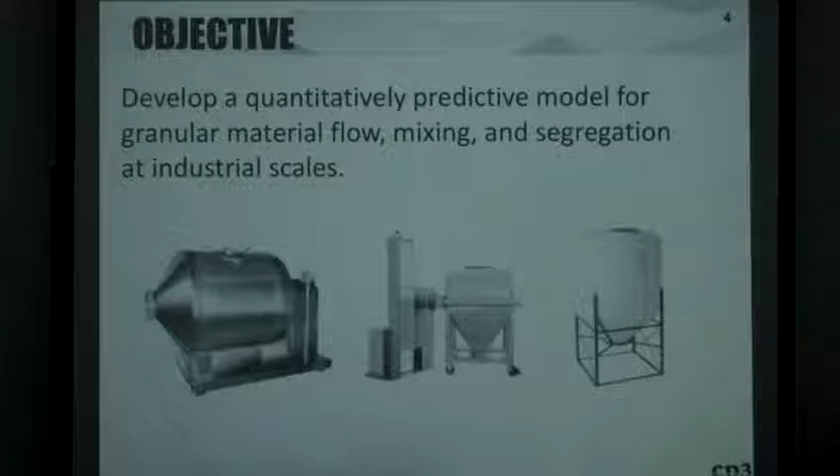For a long time, from the very beginning of DEM modeling, most comparisons with experiments have been qualitative - wow, this looks the same as that, so it must be working well. But we want to try to make it more quantitatively predictive.

The state of the art in powder flow, and especially mixing and segregation, is discrete element method simulation. Here you model individual particles - you're all familiar with this. You get the dynamics of the macroscopic system as well as local behaviors simultaneously.

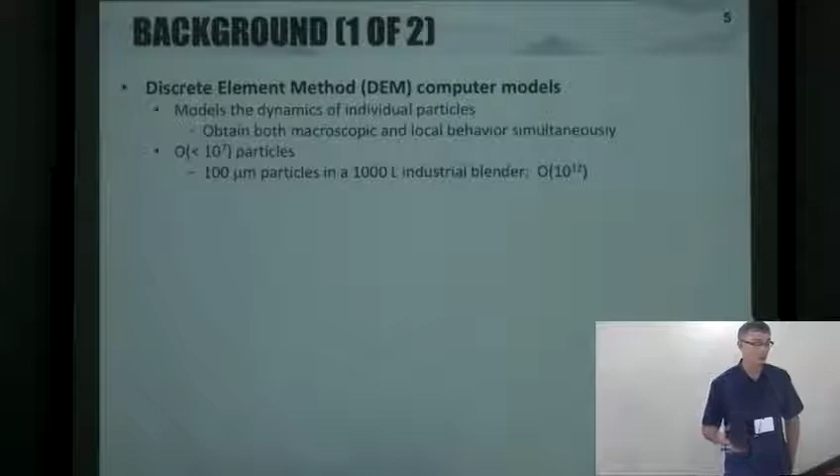At best right now, these simulations can model on the order of maybe 10 million particles. Most people using these in practice are probably modeling 10,000 to 100,000 particles, much smaller. But if you think about how many particles there are in an industrial system - a 1,000-liter container, 100 micron particles - we're dealing with 10 to the 12th particles. So we're still 5 orders of magnitude away. We've got a long way to go.

Computers are getting faster, everything is going great computationally, but we've got a long way to go. Even if we get closer and closer, the models used in DEM are greatly oversimplified typically. We're dealing with spheres - shape effects aren't normally included, especially at big scales. Contact force models are oversimplified typically, with a lot of assumptions going on.

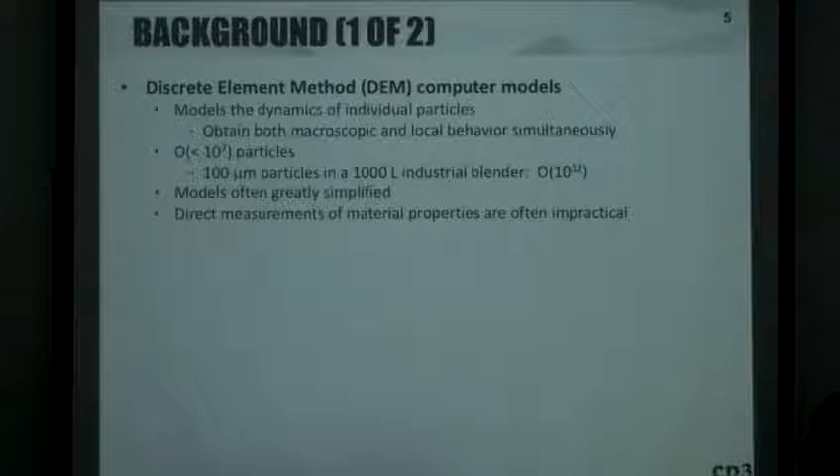Another big thing people don't often talk about is the measurement of material properties of particles. Imagine measuring the coefficient of restitution of an irregularly shaped 10 micron particle.

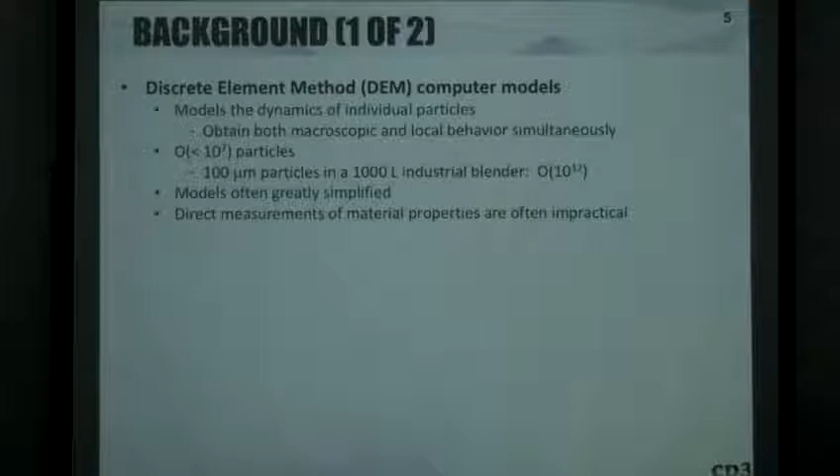People are guessing rolling friction coefficients, purely guessed. What's interesting is those parameter values are often hidden, buried through references. Someone cites a paper where they used a rolling friction coefficient of 0.005, and they go back and reference someone who used that value, and so on, until you find the first paper where they said, we don't know what to use, so we're going to use 0.005.

This happens all the time. So that's a big challenge.

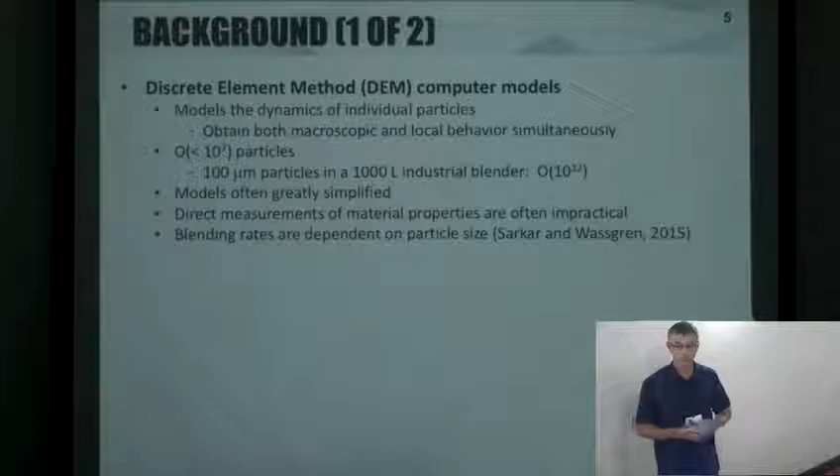The other thing specifically for blending is that blending rates are dependent on particle size. If you look at how fast particle systems blend, particle size is an important parameter. So if you use particles that are too big, it may not be quantitatively accurate.

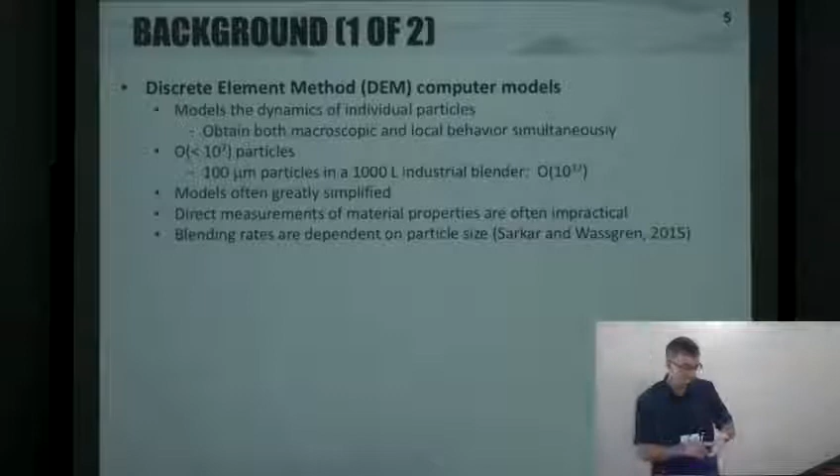All this being said, I don't want to dismiss DEM. It has very good use, very good understanding. In some cases it's quantitatively useful when dealing with big particles, like in pharmaceutical tablet coating and things like that. So it's still very useful, and I think it's particularly useful for looking at things at the local scale. That's what you'll see in this talk - we're combining macroscopic scale models with microscopic scale models which come from DEM.

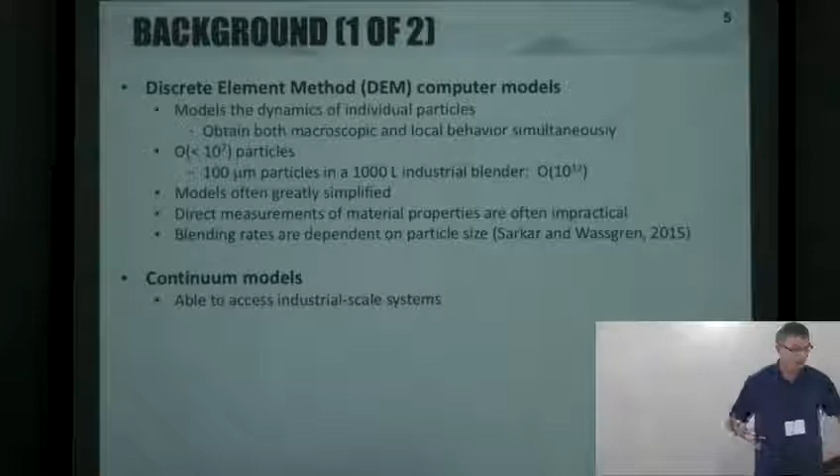So with that being said, the other way we can do things is develop continuum models. These are able to access industrial scale systems, much bigger, because you're not tracking individual particles. But you need a constitutive relation relating the stresses and strains or strain rates - we need some kind of relation there.

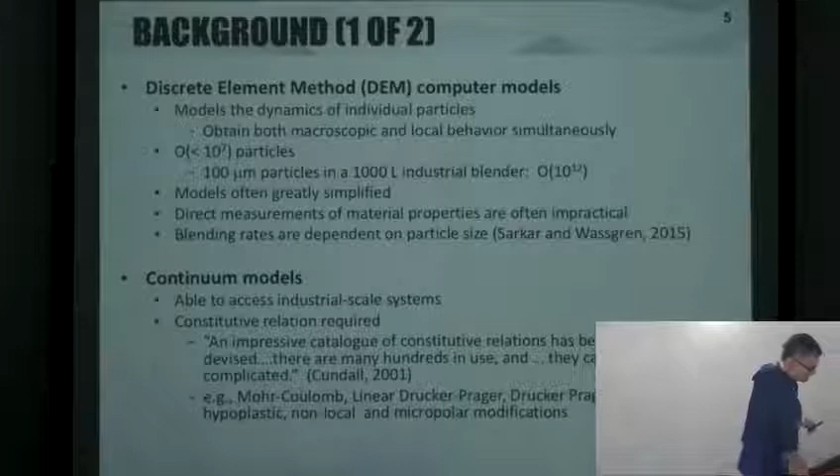Unfortunately, it's not clear what you're supposed to use. Peter Cundall, one of the founders of using DEM, says there's an impressive catalog of constitutive relations that have been devised - many hundreds in use, and they can be extremely complicated. Many are phenomenological, so you see some phenomena, and as Raphael mentioned, you tack something onto your model, and some are quite complicated.

We saw one coming out of Sandia National Lab with 76 parameters you had to put into it for it to work. You've got to measure all those things, right? So it can be a real nightmare.

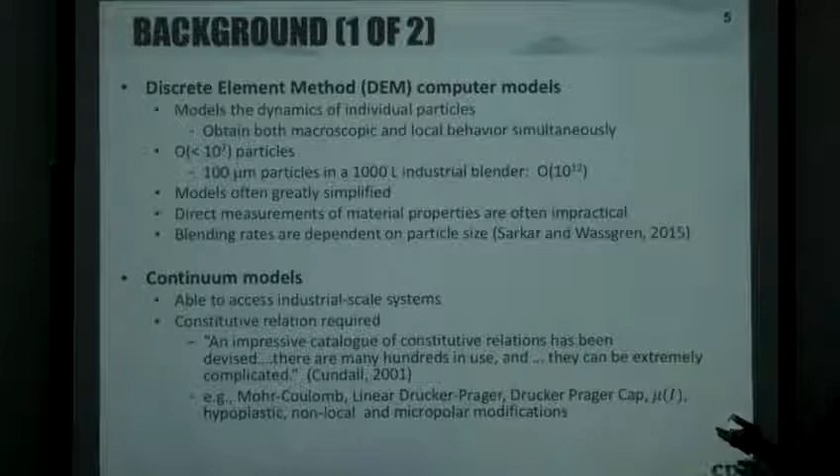I list a few here that people have proposed, and they come out of soil mechanics primarily. Mohr-Coulomb is a classic, and that's the one I'll be talking about - very simple, classic. There are more complex ones like Drucker-Prager-Cap, hypoplastic models, and modifications to include other things. So there's a lot out there. There's a question of what do you use, and I'll talk about that in a moment.

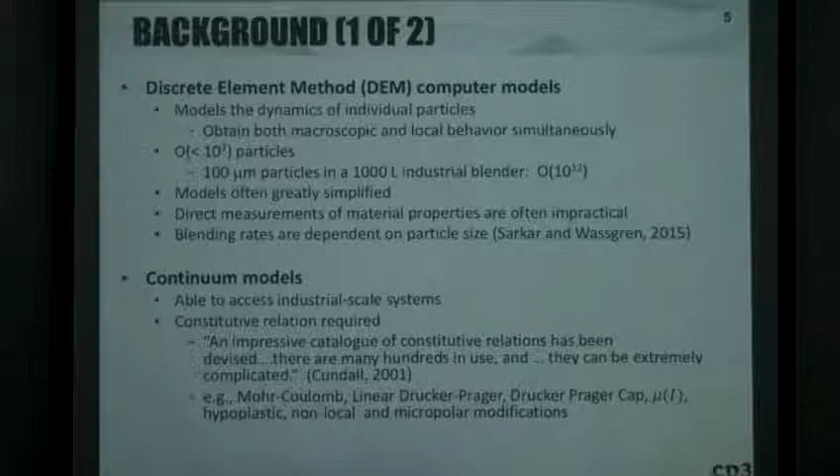People have been using continuum models for analyzing powder or particulate flows. They generally have been used to model very simple two-dimensional systems, like a chute flow, an annular shear cell, maybe a rotating drum - systems where you can make very significant simplifications so you can analyze them by hand. I give some of the references there. I admire the effort these folks put into it, the ones I've listed here, but if you actually look at how their models compared to experimental data, it was very poor.

Didn't work very well. More recently, people have been doing computational implementations using various constitutive models. This earlier stuff is from the last 20 years or so. People have been applying it for compaction problems, powder compaction - so tableting and roll compaction, these are common unit operations used in pharmaceutical manufacturing, food processing, things like that. And it's been very successful, the continuum modeling.

So like looking at solid fractions within a tablet when it's been compacted - this is a roll compaction simulation. They've been experimentally validated, work very well. They primarily use what's known as a Drucker-Prager-Cap model, which is an elastoplastic model with 6 parameters. All the parameters vary with the local solid fraction, but it works - if you make those measurements and do the simulation, it works pretty well.

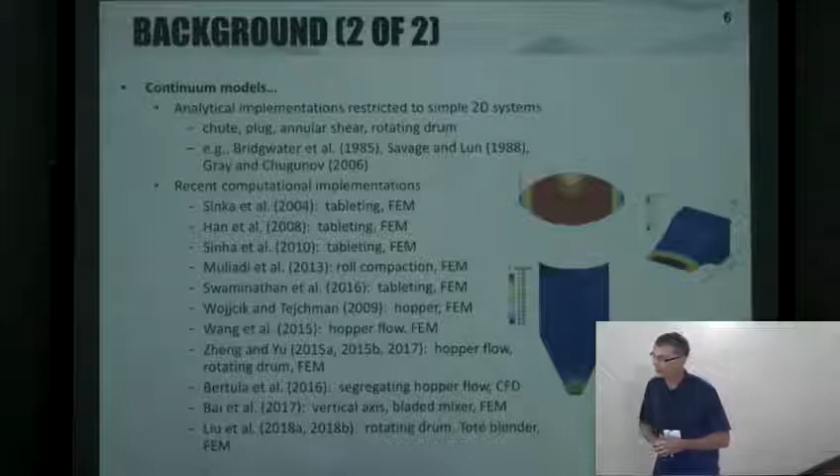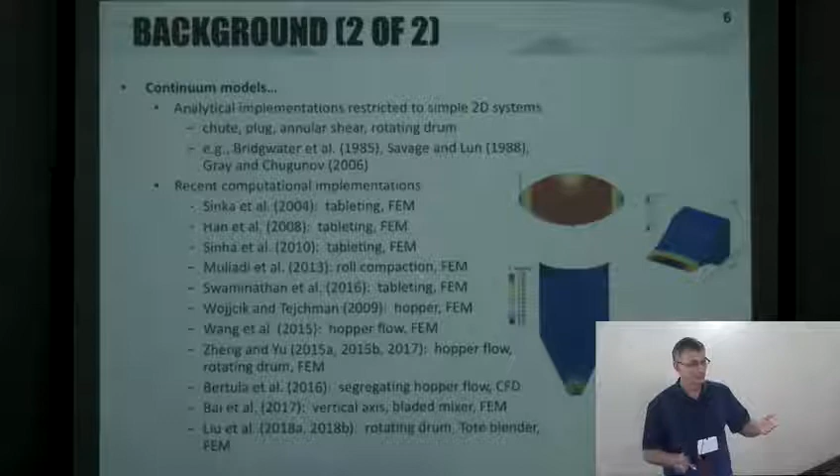Actually, when we went back through the literature, historically there were some people looking at using continuum modeling with FEM, finite element method approach, with a Mohr-Coulomb model for studying hopper flows back in the late 90s. Didn't have very much success at all, but that's been revisited primarily out of the group in Australia - Aibing Yu's group - where they started using it, and they've had very good success. And then we've gotten on board as well, just to verify and test ourselves to see how well it works, and it seems to work pretty well, surprisingly.

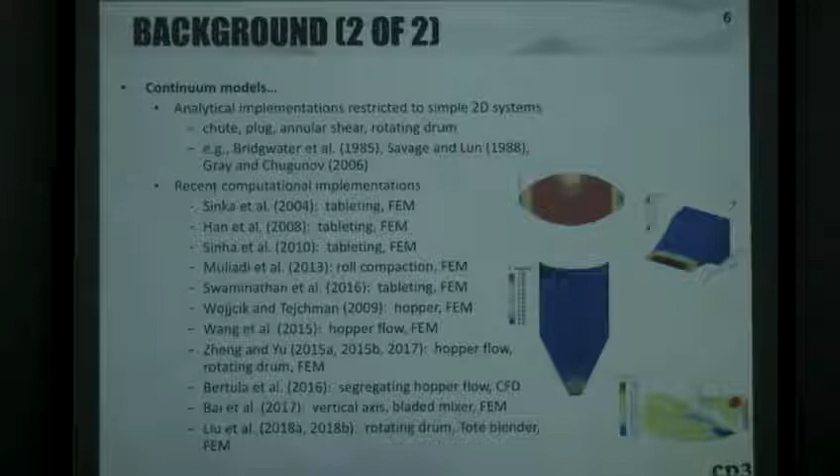And I'll show you the kind of things that we've been doing.

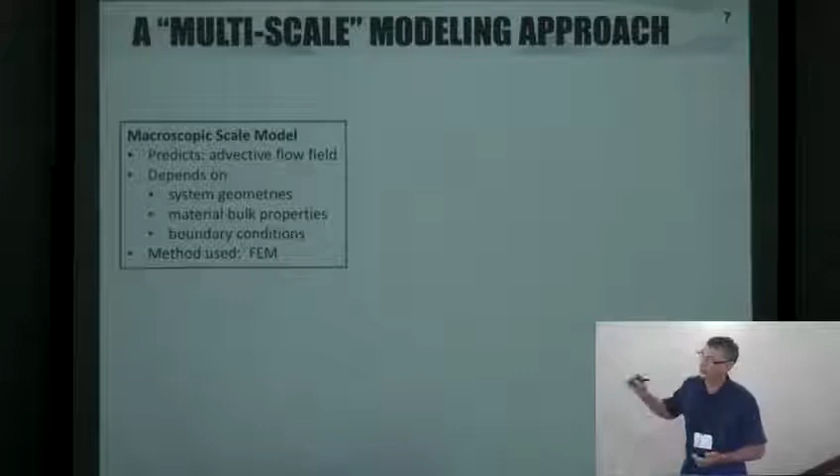Our contribution has been not just to look at the flow of the powder, but we're specifically interested in blending and segregation. And we call it a multi-scale model. I've caught some flack for that term. But the reason I call it multi-scale is because we have one scale, which is the macroscopic scale, which is really the bulk flow behavior of the powder.

So the advective flow field, just the bulk flow, you don't see the individual particles. This is the continuum part. This is where we use a constitutive model with FEM to get the general flow behavior.

And then we combine that with models coming from a microscopic scale. This is where for blending, we're looking at the local diffusive behavior of particles. We call it diffusive, dispersive, but the literature calls it diffusive behavior. So how particles are moving around or how they segregate relative to one another.

That information typically has come from, recently, DEM simulations to look at that very local scale. And you could get some of that information through cleverly designed experiments as well. So we just combine those two together using an advection diffusion segregation equation.

In this equation, C is a concentration, V would be your advective flow velocity coming from the FEM continuum model, D is a diffusion coefficient, it comes from the DEM simulations, and VP is a percolation segregation velocity. So percolation segregation is when you shear the bed of material - let's say large and small particles - how quickly the small particles fall down in the direction of gravity.

Okay, so it's one type of segregation. And so we combine them together this way and just solve this numerically.

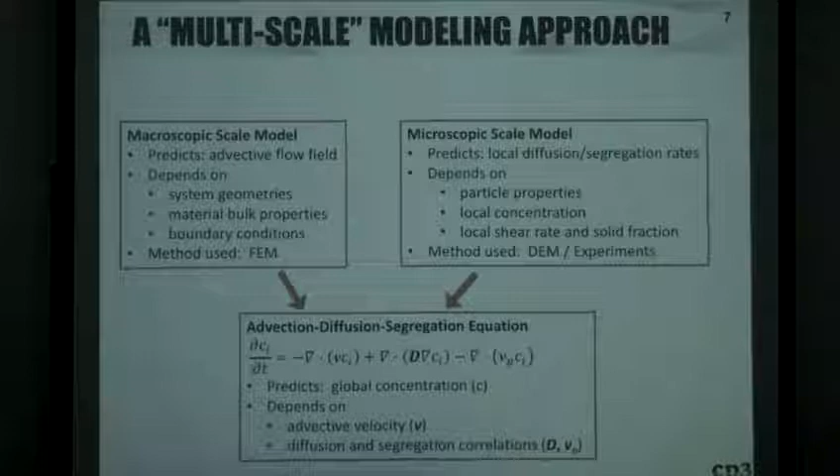As far as the microscopic scale, so how we get those diffusion and segregation relations, those have actually, for us, come from the literature. There's been some fantastic work coming out of Northwestern University where they've used free surface heap flow experiments and many, many DEM simulations where they have a well-defined flow field, just a very thin shear flow on the surface.

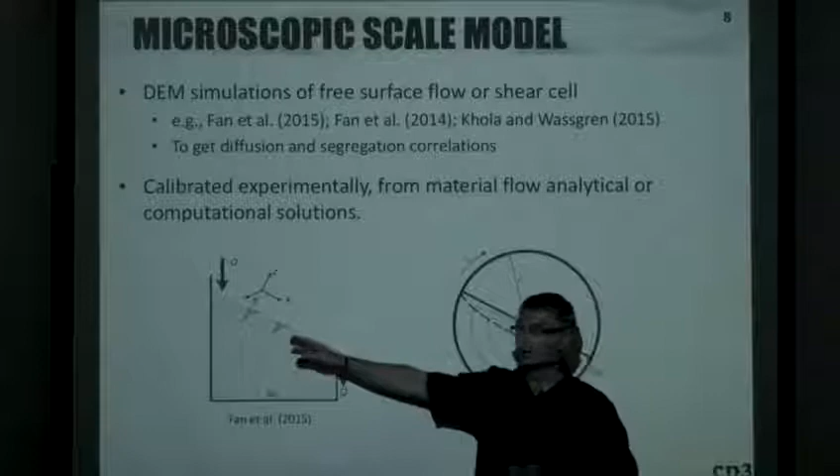They have a mix of particles coming in, and then they look at how they segregate out or mix as they go downstream, and they've done this for different size ratios, different flow rates, a whole bunch of different concentrations. And so they can get relations for diffusion and segregation constants that I showed in the previous slide, and then they've extended it to rotating drums and some other things.

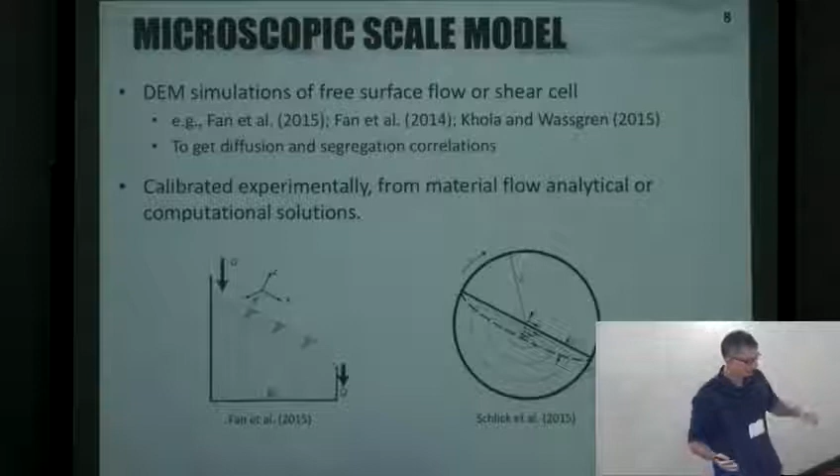But we've done some similar things, but instead of these geometries, we used a shear cell. So anyway, you can get those correlations for diffusion and segregation from previously published literature based on some of the things I've shown here.

As far as the diffusion coefficient, it's actually a diffusion tensor. Turns out the off-diagonal components, people have shown those aren't very important. The diagonal components - basically the diffusion constant is related to some constant times a shear rate times a particle size squared. And then there's a small contribution due to other directions.

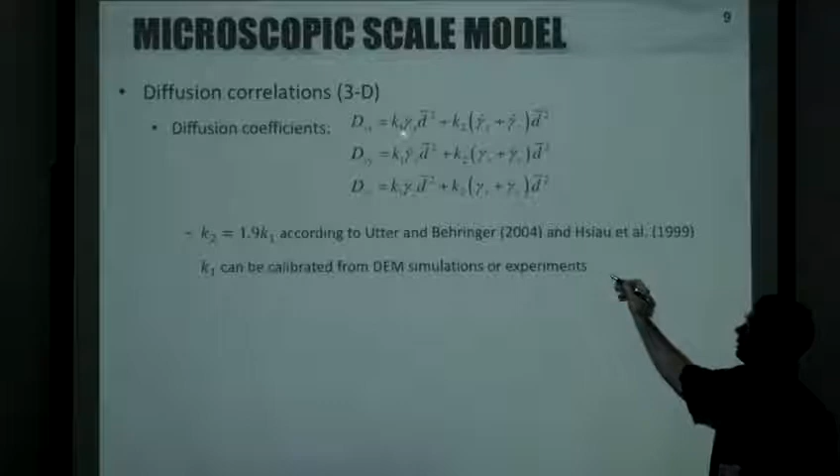And again, previous work has shown how K2 is related to K1. K1 in this relation can be found from some calibration. So again, all coming from the literature, nothing that we've developed.

The segregation correlations, again, come from the literature, from that work at Northwestern. The percolation speed of one species of particles, in the direction of gravity, is related to some constant, which is related to particle size and particle size ratio, a shear rate, and then the concentration of that species.

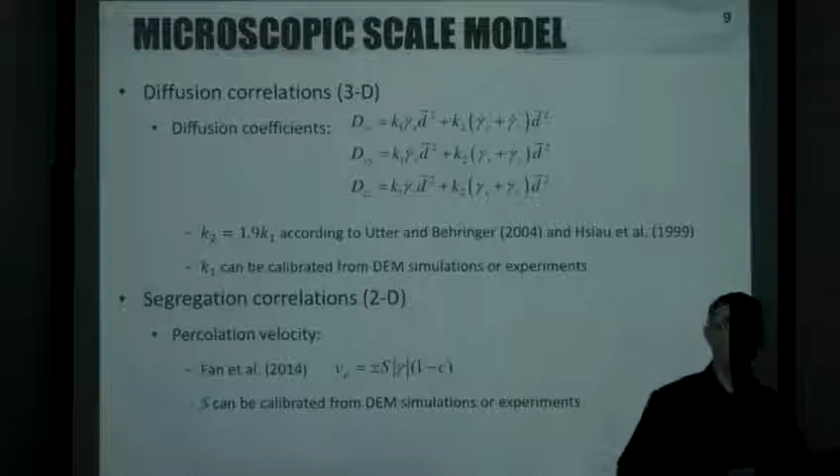And again, this basically just came from a whole bunch of DEM simulations, and it seems to compare well with the data - it's a correlation they just fit to some of the data, and it seems to work pretty well. So we made use of both of those expressions in our model.

So the macroscopic scale model, let me talk about that. We modeled the powder as being an elastoplastic Mohr-Coulomb continuum, the easiest thing we could use, motivated by what we've seen in the literature, and also by the fact that we have experience with powder compaction simulations with the Drucker-Prager-Cap model.

Again, 6 independent parameters that all vary with the local solid fraction, so you have to measure it for a variety of solid fractions. It's a big calibration effort. We've done a lot of work with the pharma industry, and they typically don't want to give us so much powder so we can measure that. So we wanted to simplify, see what we could get away with.

This kind of goes back to some of the things in yesterday's talks: let's not have the perfect model, let's have a model that works well enough, okay?

So with the Mohr-Coulomb model, you basically have normal stress and shear stress on the material. This is a failure plane. If you stay inside here, it behaves elastically. Once you hit the failure plane, then you start to shear the material, and how it shears is based on a flow rule. We use a non-associated flow rule, which I won't get into. There's an internal friction angle, cohesion value. It's a very simple kind of model.

And we're implementing that kind of model in a commercially available FEA package, Abaqus Explicit, again with the idea of technology transfer, trying to hand this off to the next group of people.

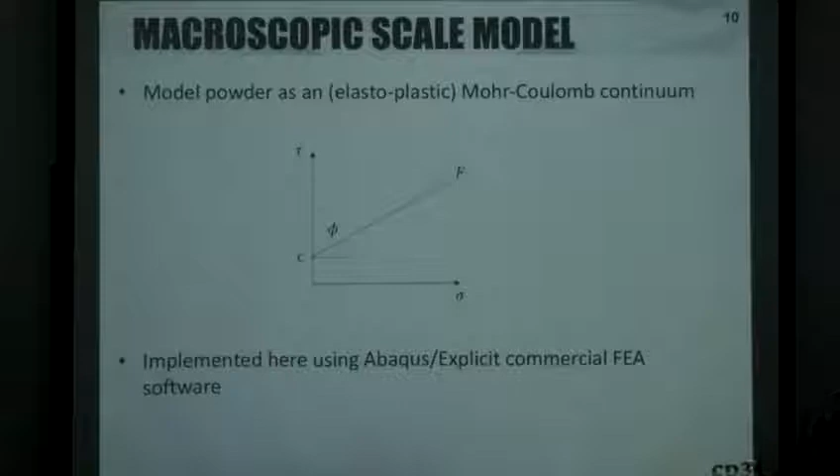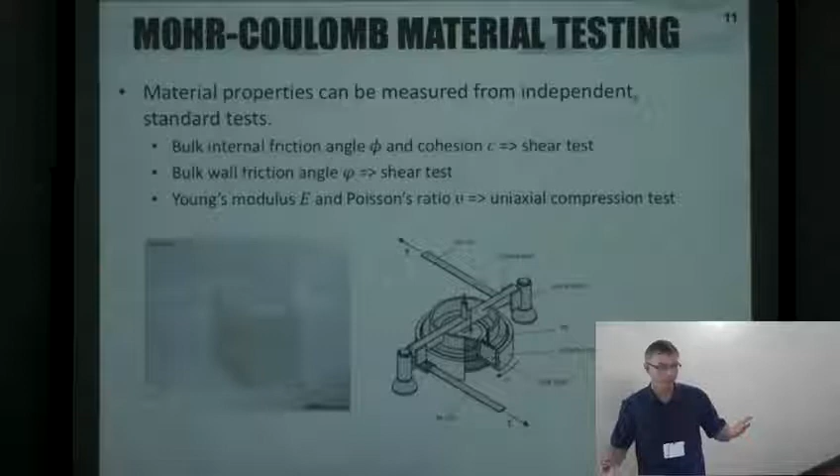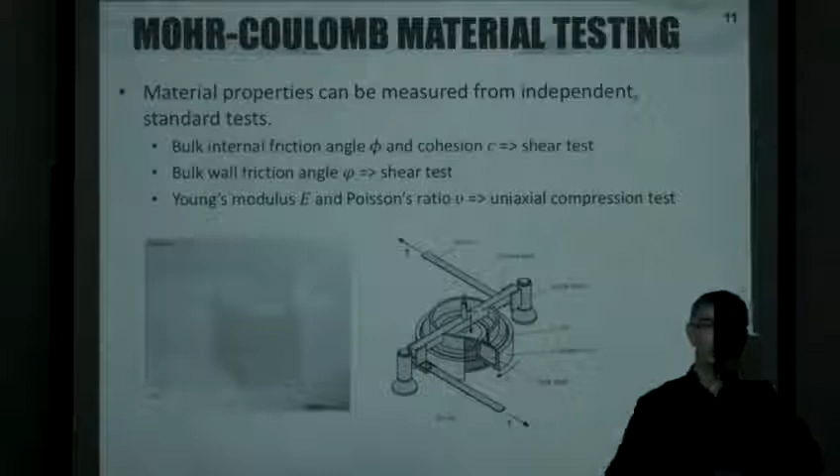As far as getting material properties at the macroscopic scale, that Mohr-Coulomb model is calibrated with standard tests, a shear cell test and a uniaxial compression test. So we did experiments to measure some of the materials. We also did these kinds of shear cell tests with DEM simulation because we compared some of our results to DEM results, so we made sure we used the right corresponding bulk level behavior properties.

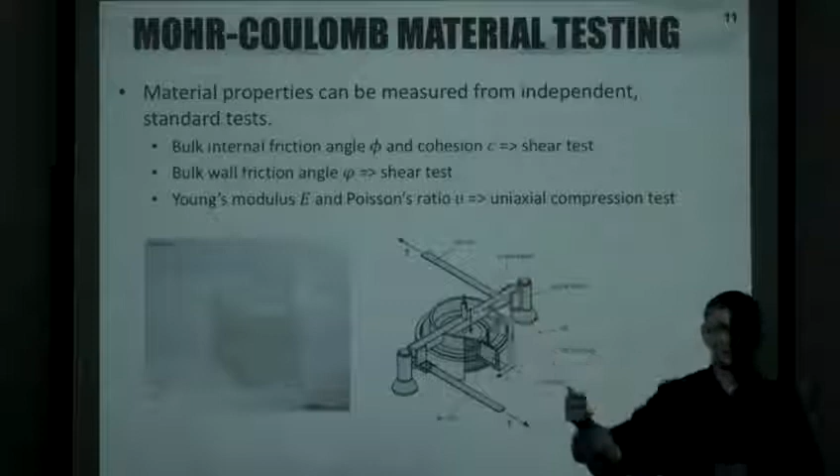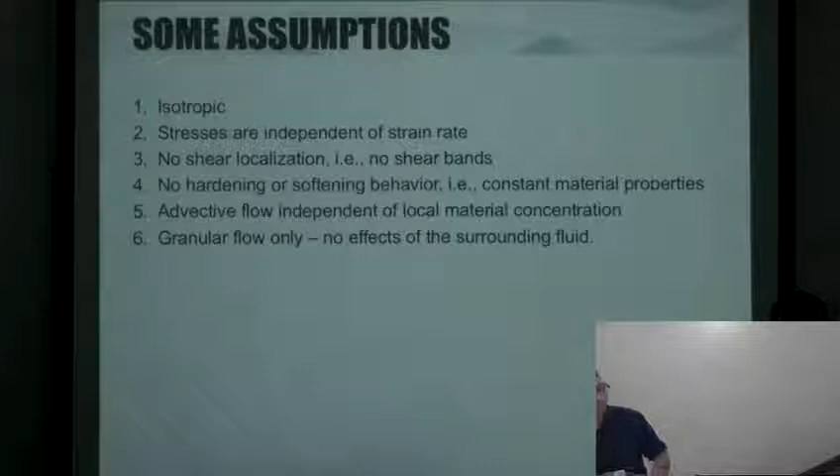So let me just say a few assumptions about the Mohr-Coulomb law. It's isotropic, so you can't deal with elongated particles. The stresses are independent of strain rate, so it's all quasi-static, there's no strain rate dependence there. No shear localization, so you don't get the formation of shear bands that you often see in particulate materials. No hardening or softening behavior, all the material properties are constant.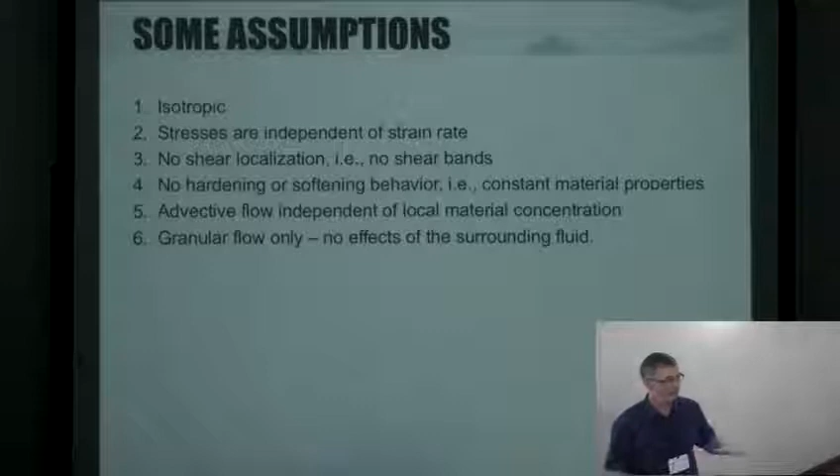In this particular version of what I'll show you, the advective flow field is independent of the local material concentration, so we don't have any feedback when the concentration changes. And of course, it's only a granular flow, there's no fluid effects in here.

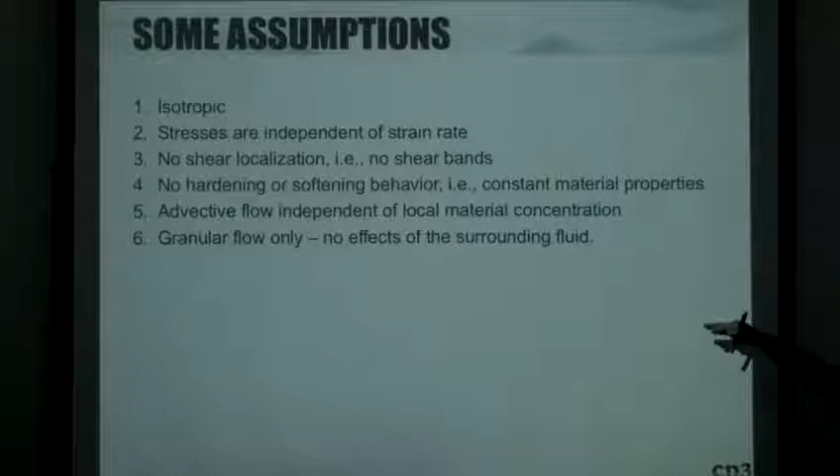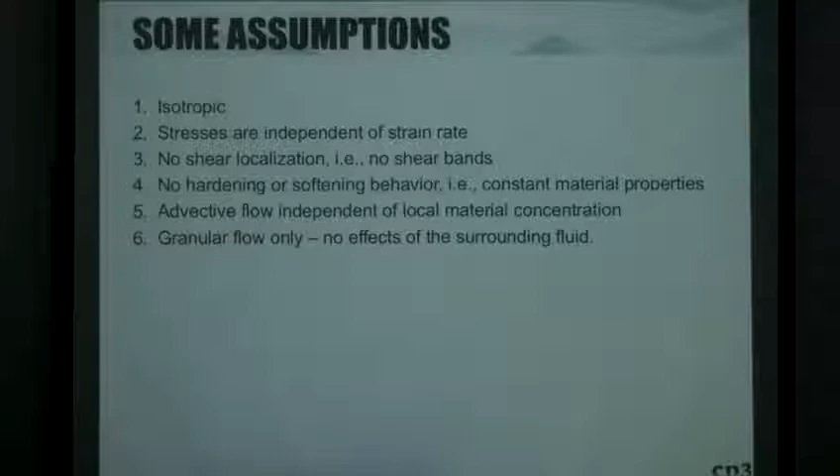The reason I wanted to show this is, A, it's important for you to know that, but B, I've caught some more flack about using this simple model because people who deal with these constitutive models say, oh no, this is too simple, you have to have this effect, this effect, this effect, something super complicated. And what you find is that this simple model seems to work pretty well on its own. You don't have to have all those effects in there to get something that's reasonable. It's been hard to get certain academics to accept that.

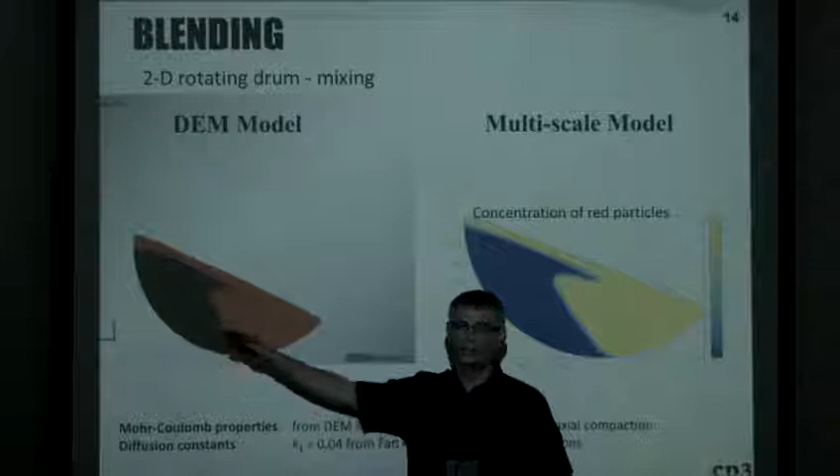One of the first things we looked at was a 2D rotating drum. We looked at mixing, and compared against the DEM model because it was easy to control, we had all the parameters in the DEM model and could get the measurements easily. On the left side is the DEM model, red and black particles are all identical except for color. The right-hand side is the FEM model. And what we did is we incorporated only the diffusive blending.

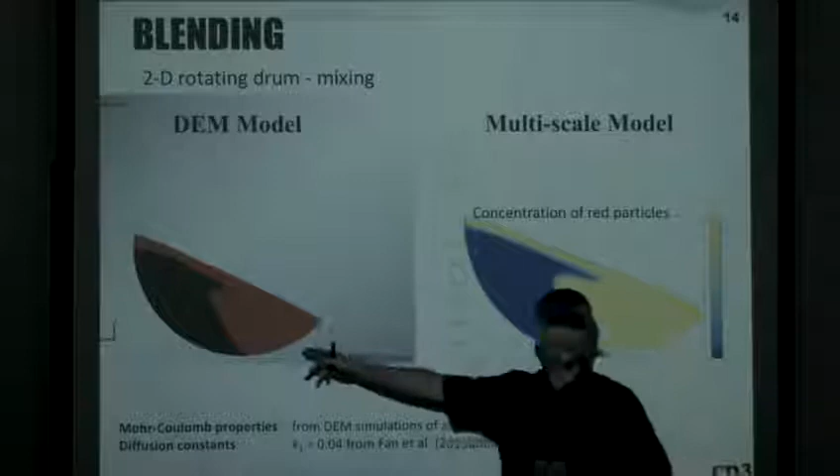There's no segregation in this. The parameters we use here came from the shear cell tests of the DEM particles. So the Mohr-Coulomb parameters came from those DEM simulations. The diffusion constants came from the Northwestern work. We didn't backfit any data - it was all data coming from independent sources.

So let's show a little movie. On the right-hand side, you're seeing the concentration of red particles, where yellow is a lot of red particles, blue is no red particles. So qualitatively it looks pretty good - it's mixing. That's great to see.

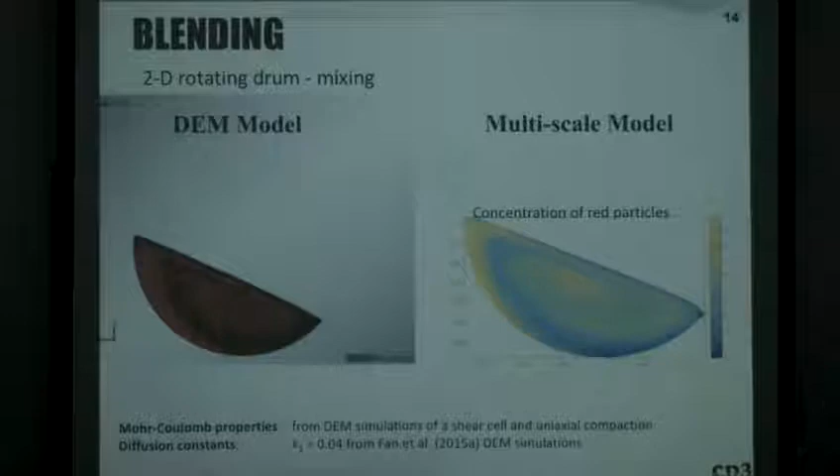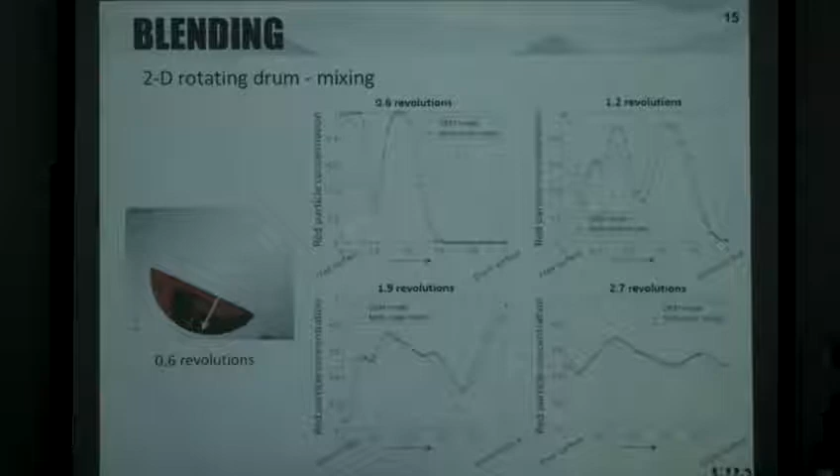Then we did some more quantitative measurements. We took a line down from the free surface, had some cells, and counted the concentration of red particles. We did that for the FEM simulations and the DEM simulations - the red are the DEM simulations, the blue are the multi-scale model with the FEM. These are at different times through the rotation. You can see a pretty good match here, so it works pretty well.

There's a little offset. We think that's because the free surface angle was off by about a degree or two between the two models, so it kind of offsets things. But overall it worked pretty well.

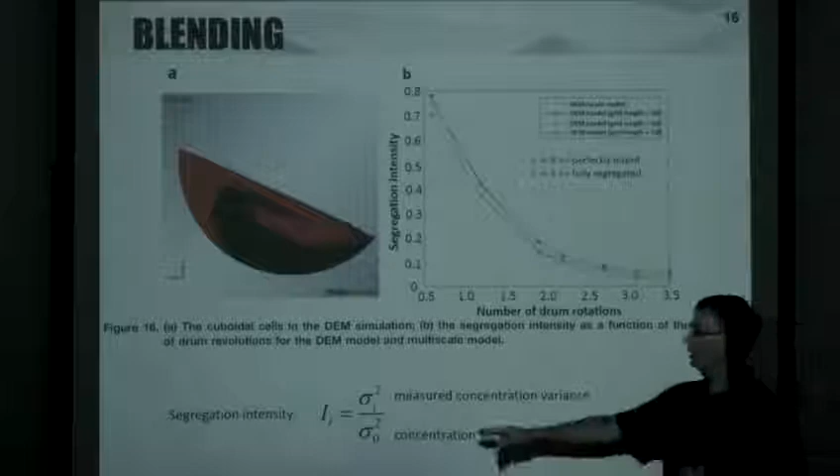Since mixing was what we were interested in, we also measured a segregation index, or intensity of segregation, which is basically a measured variance compared to the variance you'd get if it was completely segregated. It's a standard way to measure mixing or segregation. If this value is 1, it means it's completely segregated. If it's 0, it's completely randomly blended.

The dashed line was our FEM model prediction, our multi-scale model prediction. The other lines are the DEM simulation results using different box sizes, because it turns out, due to the finite size of particles, the segregation index depends on the size of your box. It works pretty well, and again, no fitting going on here - this was all independent measured tests.

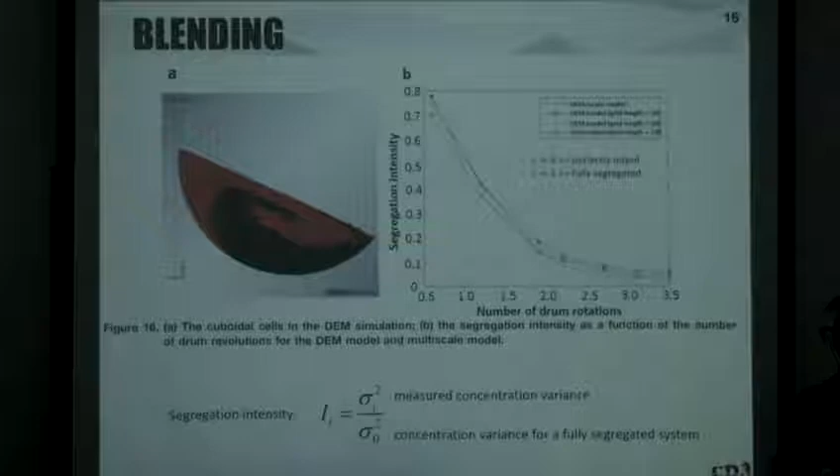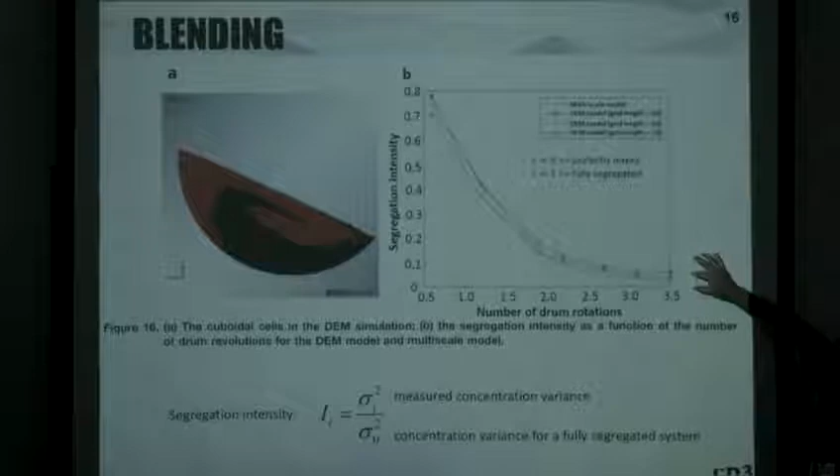One interesting thing is that the multi-scale model will eventually go to 0, whereas in the DEM simulations, because of the finite size of particles, it won't go to 0. So the model works pretty well out here, but for long times you'll have a little bit of an offset. But we know what the final result should be - from probability, there's a randomly mixed variance value, so you can calculate when you can turn off the simulation as you approach the randomly mixed value. That works pretty well - we're pleased to see that.

So then we decided, okay, let's push it. The previous work was two-dimensional, nominally steady. So then we went to 3D and unsteady. Here we modeled a tote blender, this kind of shape, and it rotates about that dashed line axis.

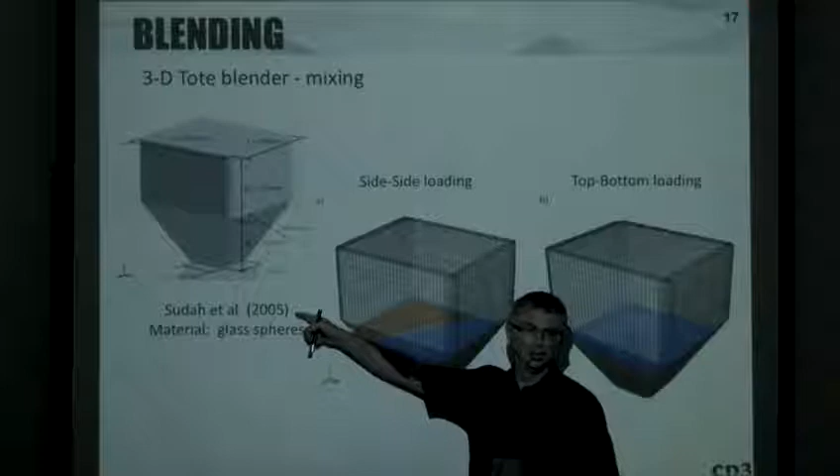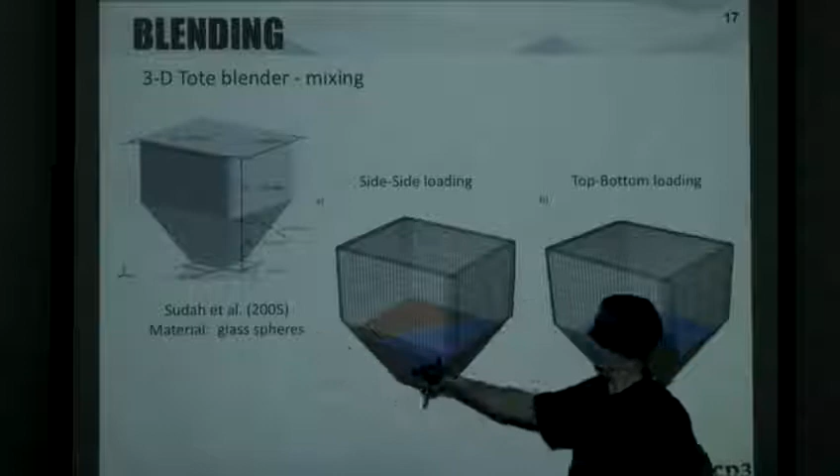We did this particular blender because there was some experimental data in the literature out of Rutgers, where they used glass spheres and made measurements of the segregation. They actually made a relative standard deviation measurement of mixing, doing side-to-side loading of the material and top-to-bottom loading, and also different fill levels.

So we used the same kind of model, the FEM model, because we can deal with unusual geometries. We used the same blending model, just with the same diffusion coefficient. The difference here was now we actually have a real material, so we didn't want to use the DEM-derived diffusion coefficients coming from the Northwestern work.

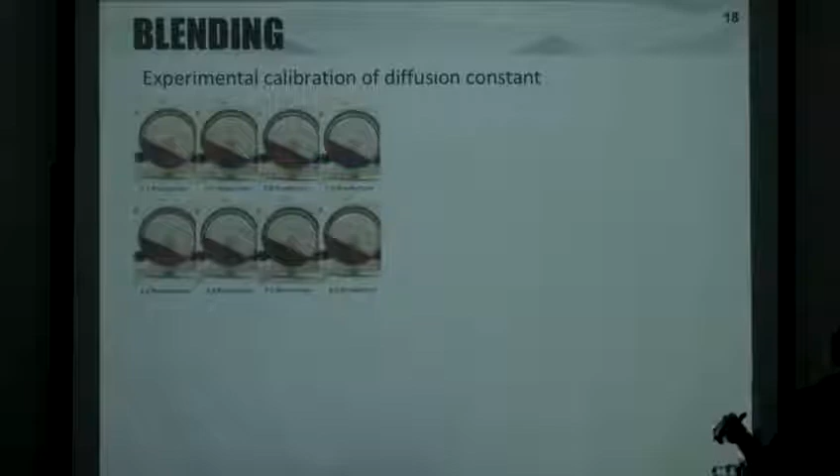So we actually went in the lab, had an undergrad build a rotating drum experiment with red and blue particles. These were glass spheres, just like the Rutgers work. Rotated around, saw how it mixed, did some video analysis to get the concentration of the particles, and then we ran the same multi-scale mixing model.

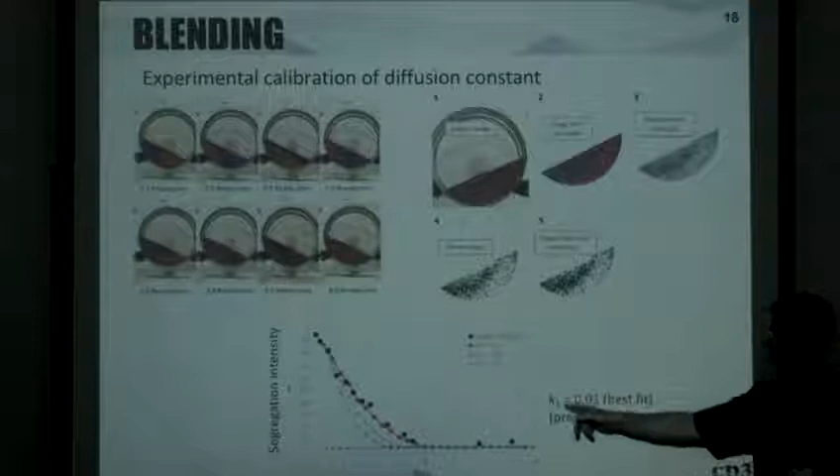For this geometry, we backfit - what constant for the diffusion coefficient should we use to make it fit best for real glass spheres? We got a value for the K1 value and the diffusion constant of 0.01. By the way, the DEM-derived one for ideal spheres was 0.04, so it turns out it's not that far away. But we wanted to use an experimentally measured value.

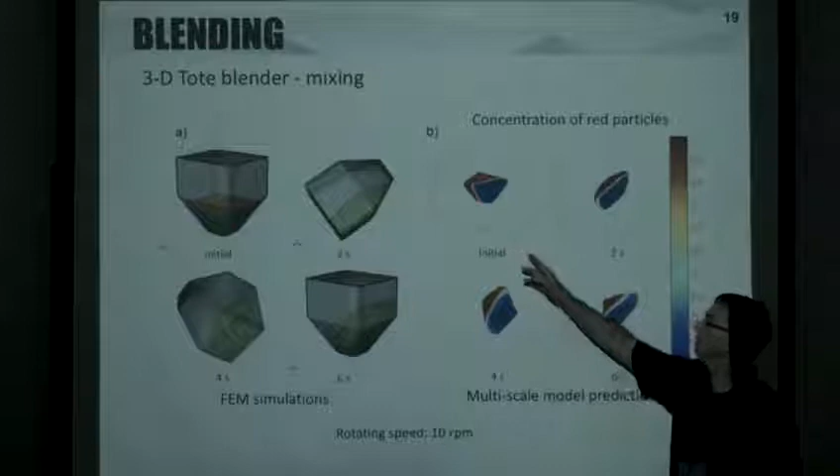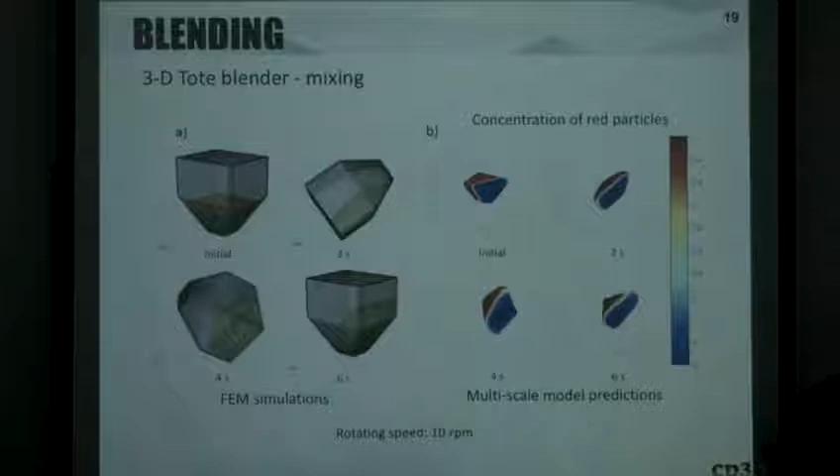We were looking at here, this is the concentration of particles for the side-to-side loading at different times. It's hard to see how well they mix, but side-to-side mixing, as you might imagine, is terrible. Top-to-bottom mixing is great. But I have a more quantitative comparison, and that's here.

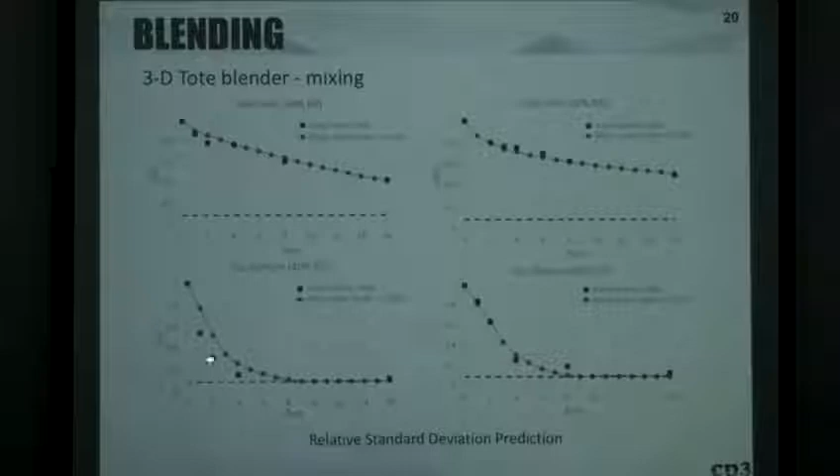The bottom is top-to-bottom filling. Again, 40% fill, 60% fill. It works pretty well. There's a little discrepancy here. One thing about the Rutgers data is they didn't have any uncertainty bars, so I don't know whether this is significant or not. The dashed lines are the probability-based prediction of what the best mixing is going to be for random mixing.

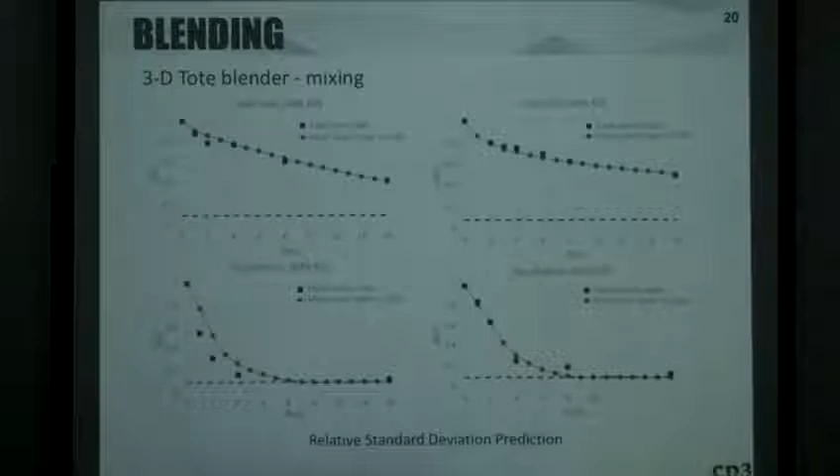It works really well, and we don't even have a complicated constitutive relation. Okay, even with that, again, people give us a hard time. It shouldn't work, but it somehow does.

Another interesting thing is if you look at the experiments, one thing that we actually did some experiments of our own to try to measure the mixing on our own. We had trouble with it because every time we'd rotated a couple of revolutions, then we'd use a thief probe to sample so we could get a mixing index.

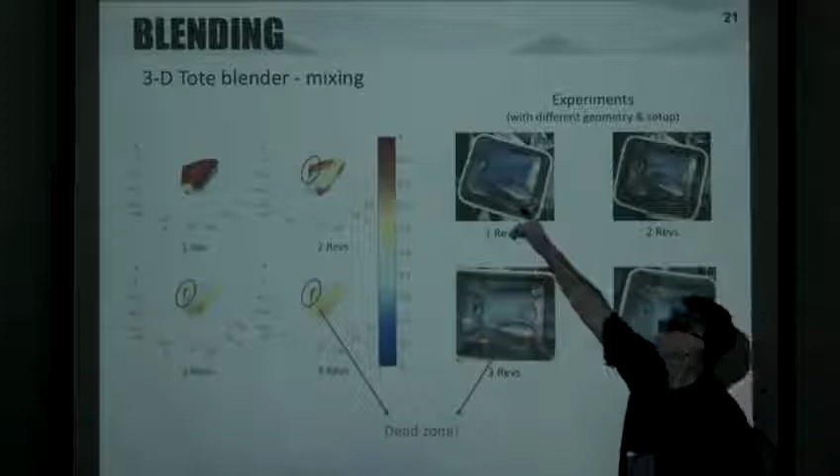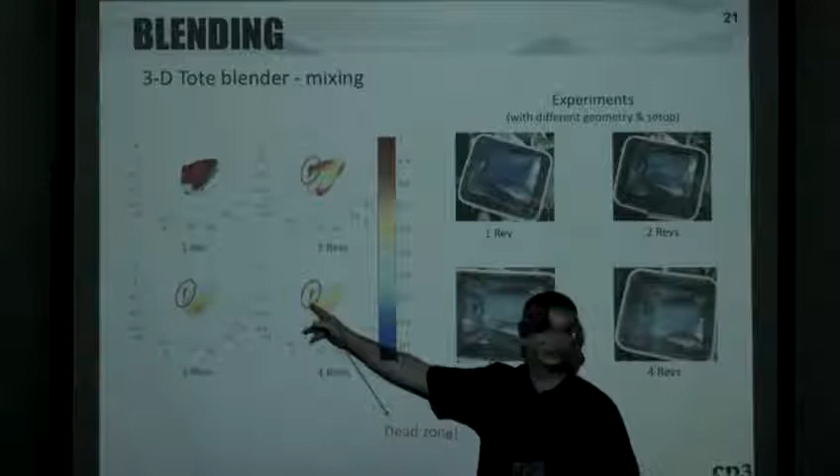But every time we used the thief probe, we disturbed the powder beds too much that it became impractical. But when we ran those experiments, we noticed we had blue and white spheres, and we noticed there was a dead zone where things didn't mix in the experiments. And interestingly, in the simulations, we saw a dead zone there as well, which was quite interesting. So qualitatively, it produced some interesting similar results.

So the last thing I'll talk about is segregation. So the previous work was dealing with just blending, but now we're dealing with segregation. So two different particle species.

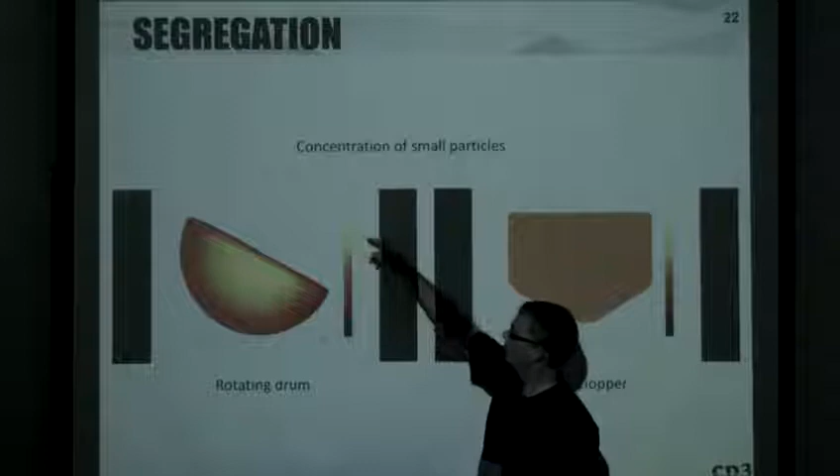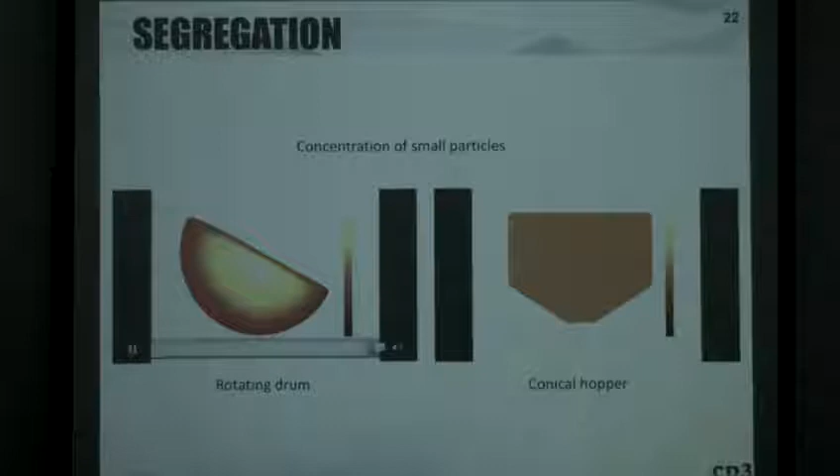What you're seeing in this rotating drum simulation is this is a concentration of small particles. So yellow means a lot of small particles, dark colors mean mostly big particles. And this is kind of a classic thing where as you rotate a drum, the small particles avalanche down the surface and then they collect toward the center. And you get this kind of stationary behavior after some time.

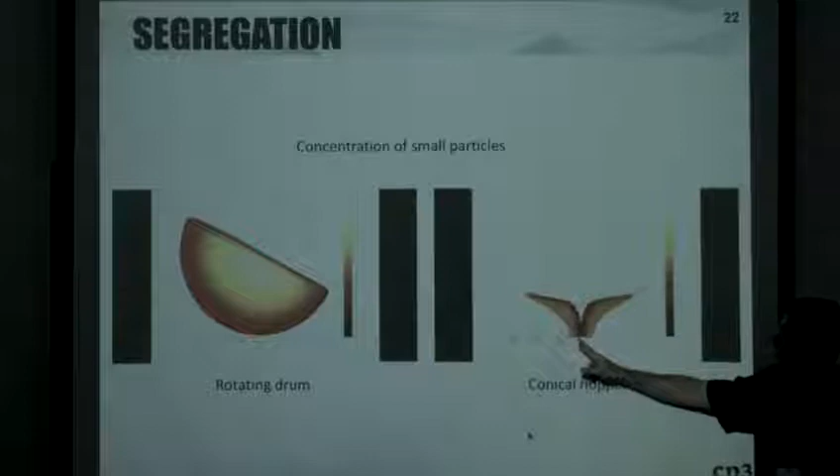We also did a conical hopper, so this is an axisymmetric hopper. So discharging, you see a collection of coarse particles on the top, and they come discharging out, and at the very end you get some fine particles that come out.

We did those two geometries because the Northwestern folks had done DEM simulations of that, so we could compare against it. And then a former student of mine, Bill Ketterhagen, did some experimental work in hoppers with two different size spheres, so glass beads. So we wanted to do that to compare against his data.

So now the advection diffusion segregation equation includes both blending and segregation. Again, using a diffusion coefficient coming from the literature and the segregation expression coming from the Northwestern group.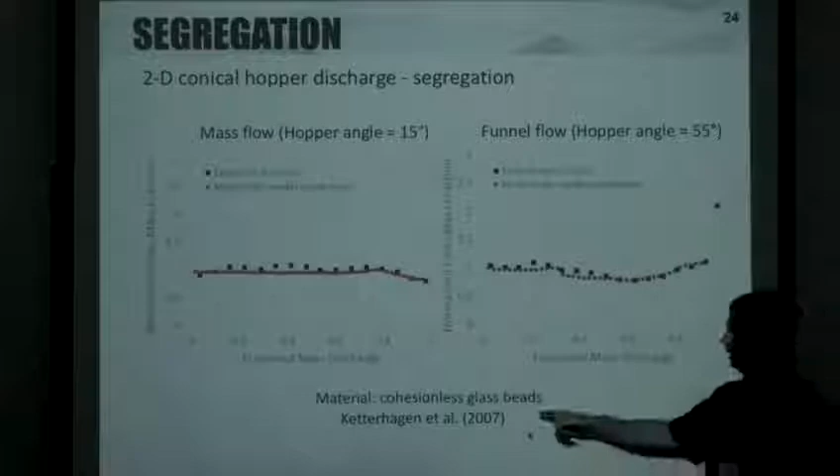Pretty good. And then we also did the hopper discharge, comparing against the experimental work of Bill Ketterhagen, where he used glass beads. What he's plotting here is, this is a discharging hopper. What we did is we collected samples at the exit of the hopper and then looked at what fraction, by mass, is the fines or the small particles. So that's what the vertical axis is.

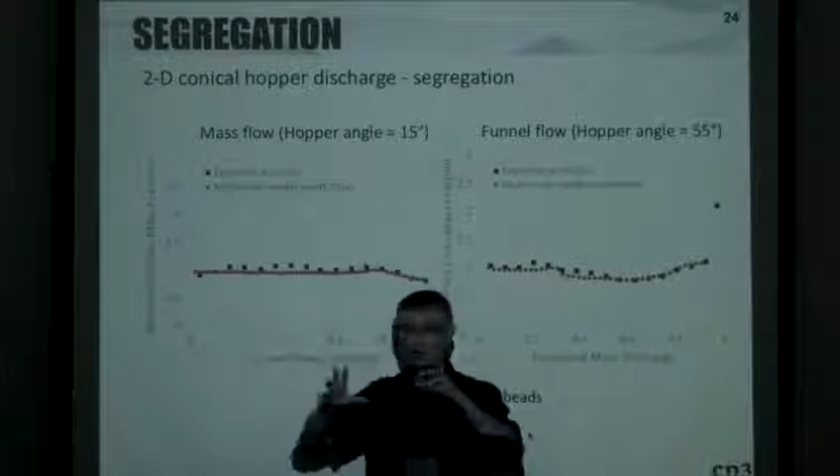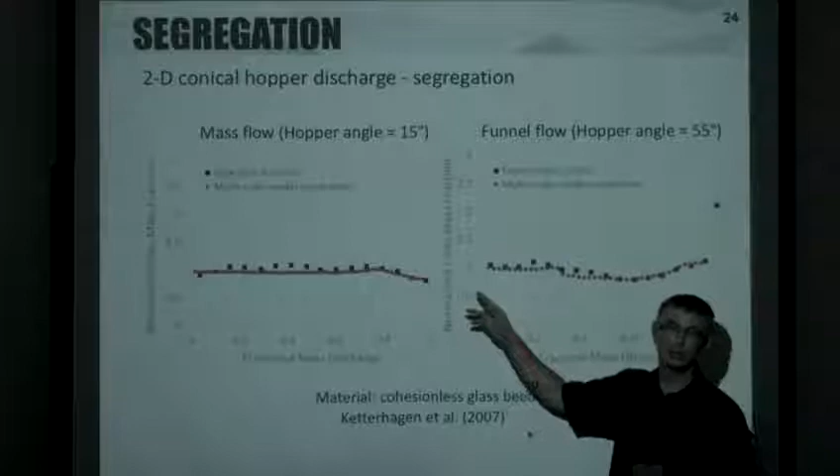So what you see is that the particles start pretty well mixed, sort of stays at a value of 1. It's what you expect if it's well mixed. And then it drops down a bit, which means that it's primarily coarse particles coming out at the very end. And then that was for mass flow. This is for funnel flow.

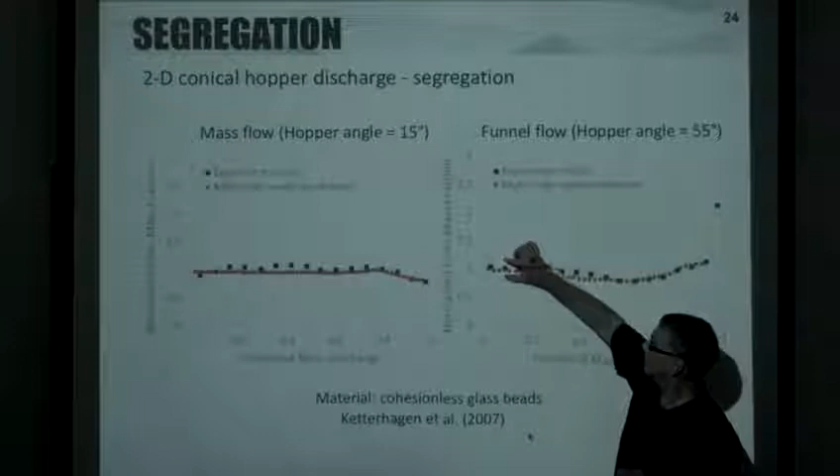You see a dip, mostly coarse particles, and then a bunch of fines come out at the end. The black dots are the experiments, the red dots are the simulations. What I didn't show here were the error bars on the experiments, but they're about that big, so we're pretty close.

What we can't do is get the very end point in the FEM model because of the continuum. Experimentally, there's just a few particles left as they come out. In the continuum model, there are an infinite number of particles, so we can't quite get that far to the very end.

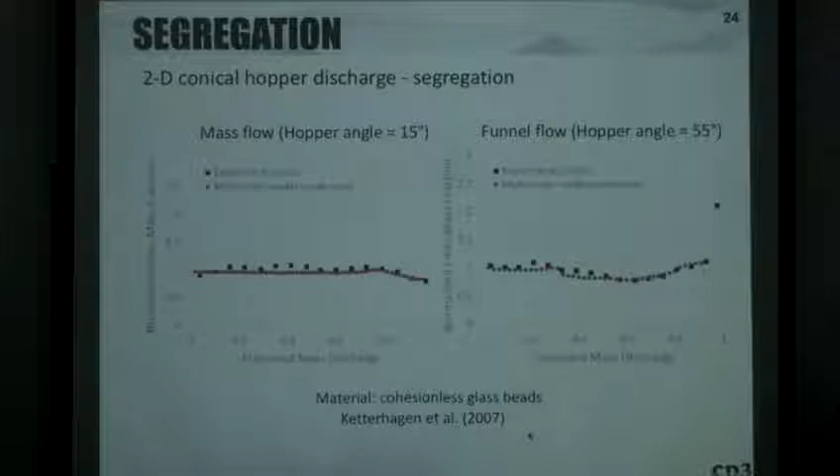But it does a pretty good job. So, summary: number one, don't let the perfect be the enemy of the good. We're all striving to do the best model we can, but especially for industrial purposes, sometimes a model just has to be good enough to make a decision. I think a fellow said yesterday, if the models are within 25%, fantastic.

What we did is combine macroscopic and microscopic scale models. We're able to quantitatively predict mixing and segregation compared to some experimental results and DEM results, so that's good. I think a big thing is we can determine model parameters from independent standard tests. We don't have to necessarily backfit things. So that's a really fast summary.

But let me offer some thoughts since I'm almost out of time. It's difficult to find published papers with all of the parameters needed to compare your model to.

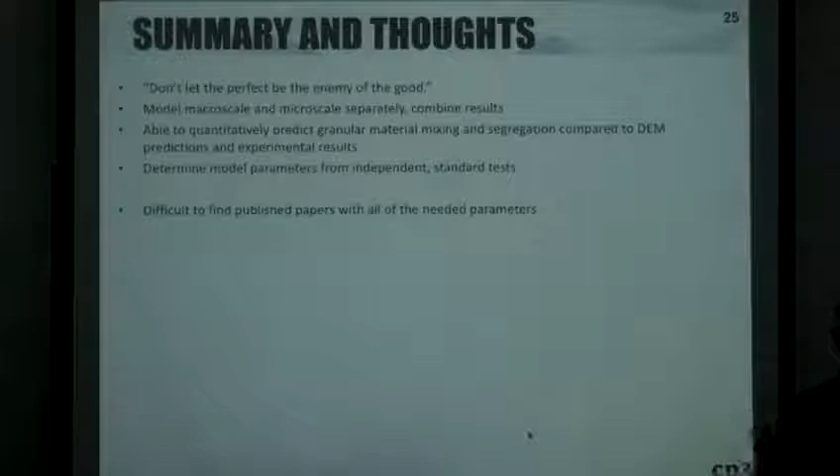The experiments here, if you paid close attention, used glass beads because we have glass beads in the lab and I know what their properties are, more or less. There is data in the literature dealing with powders, but I just don't know all the parameters for me to model that. So that's an issue. Probably for the short term at least, we'll have to do all of our own experiments simultaneously so we can get those parameters.

What about cohesive materials? Since I was dealing with glass beads, those are nominally non-cohesive. The model has the capability—the Mohr-Coulomb model has the capability to include cohesion. As far as diffusion and segregation are concerned, they're pretty much diminished if you have any significant cohesion. The diffusive movement of particles isn't going to happen because they're stuck together, and because they're stuck together, they're not going to segregate.

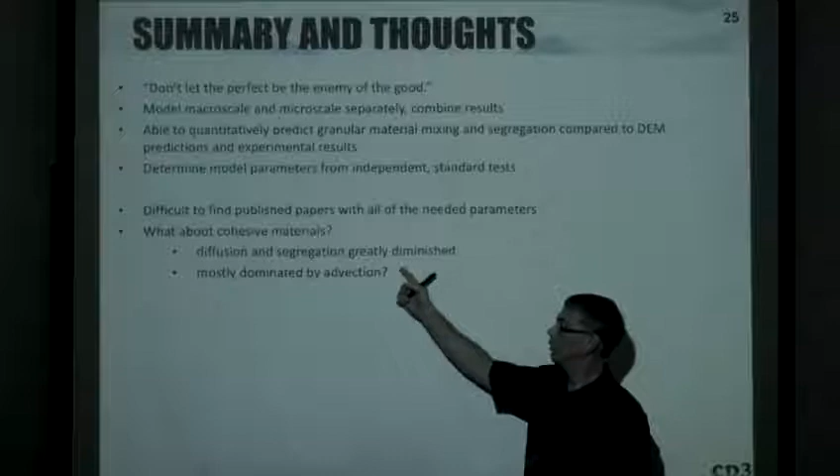So incorporating cohesion for looking at mixing and segregation maybe isn't so significant to include in those models. I think primarily the flow would be dominated by advection, so whatever mixing occurs is going to be primarily advection dominated.

Items to improve: I think we need more validation, dealing specifically with more powder flows as opposed to big glass spheres. I think there's some issues—how do you calibrate diffusion and segregation parameters in reality when you're dealing with irregularly shaped particles with widely varying size distributions, et cetera.

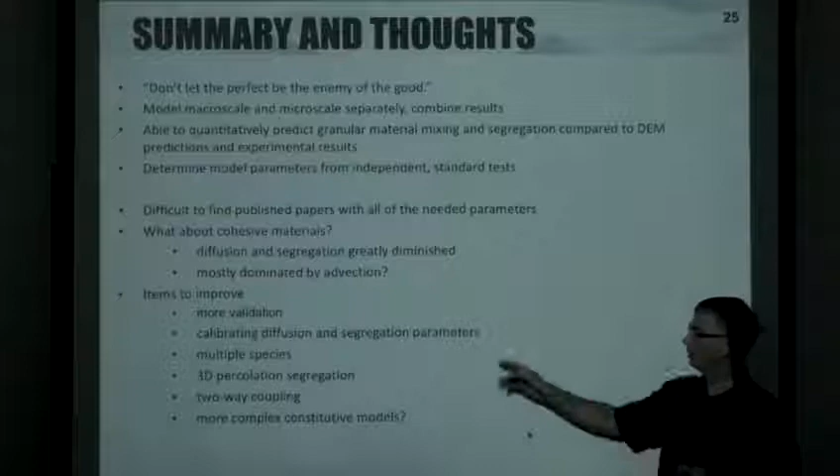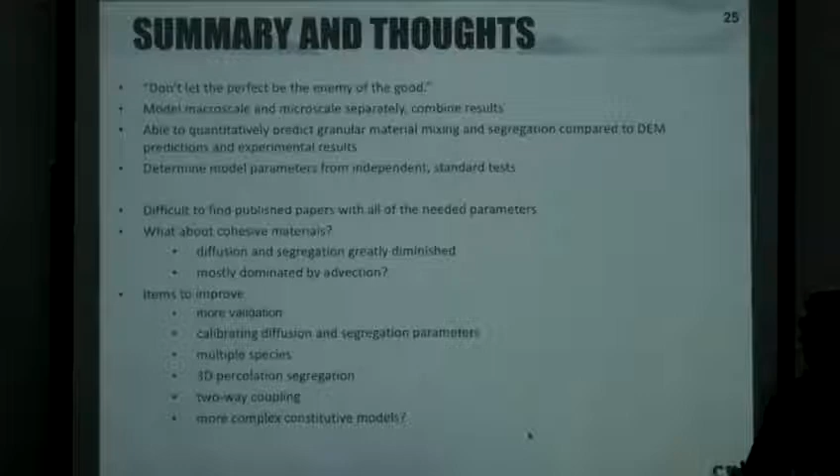The blending and segregation work we had was just two species. How do you incorporate multiple species? Actually, the Northwestern group is working on that. The segregation work was actually all two-dimensional. The blending was 3D, but the segregation was two-dimensional because of the governing relation for the segregation model—that was really derived for 2D, so that needs to be extended to 3D.

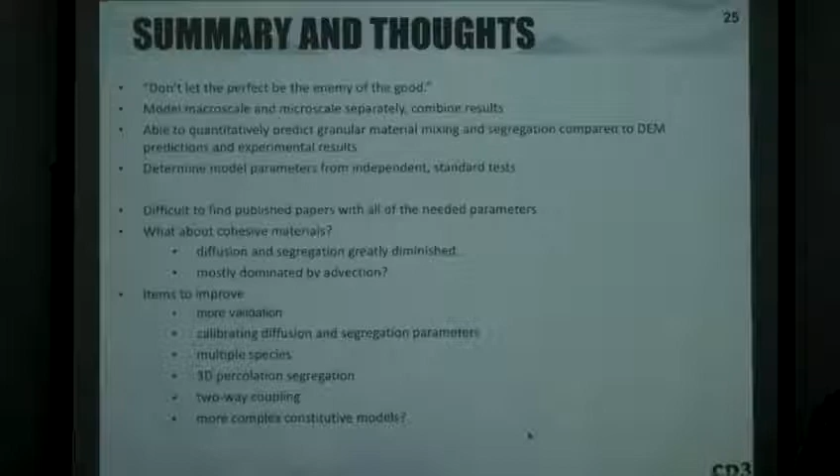Two-way coupling is possible, and we've actually started that, where as the concentration varies, you can change the material properties and put that within the continuum model, so the whole thing's linked together. We started doing that, but you're going to have to make some measurements about how material properties vary with concentration. We just haven't done that part.

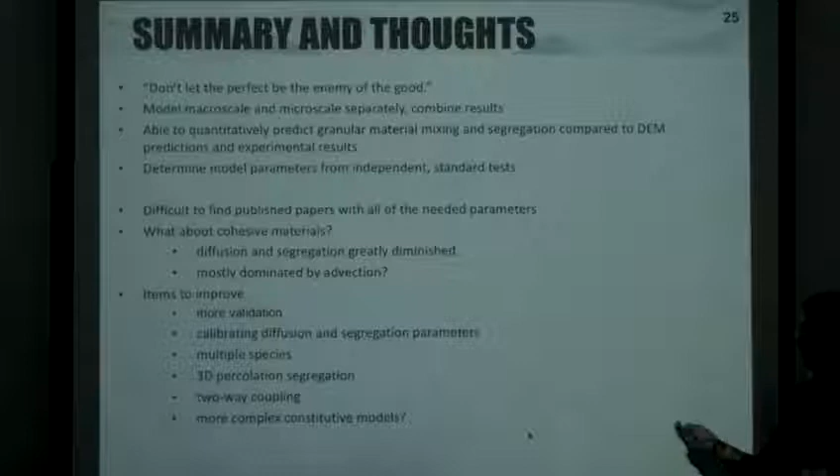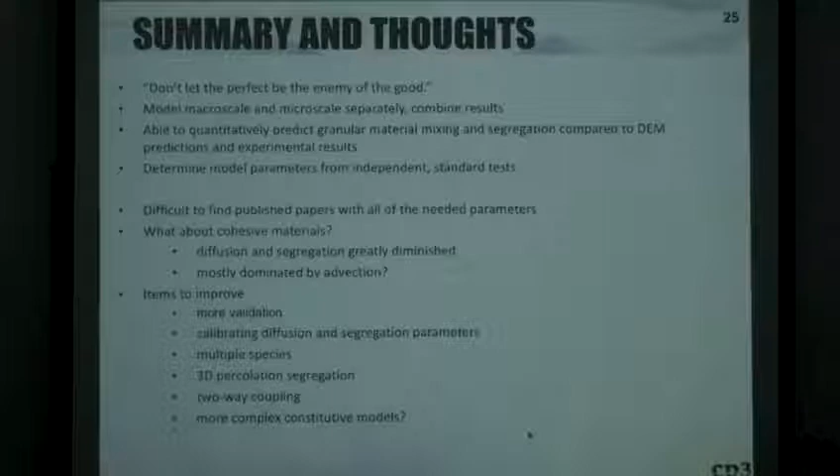Do we need more complex constitutive models? I put that one in there to satisfy the people who give me a hard time. My answer, based on what we've done so far, is it doesn't seem to be the case, but we only looked at some simple systems. More complex systems, sure, maybe there need to be changes. So possibly, depending on what you need to do, I guess.